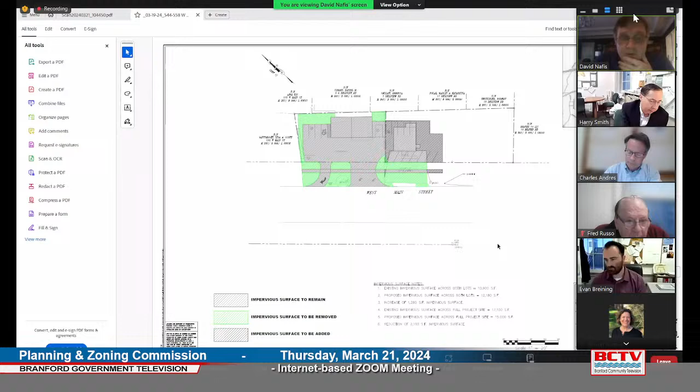Over the past couple weeks, we had... well, maybe I can just refresh a little bit of what's going on. We have the site with the existing building here. This building is going to remain, it's going to become the auto repair shop. This existing house is going to be razed right here. It's going to be gone.

And it's going to become part of what will now be the parking area for the cars that are required for the site, and then we're going to have extra parking in this area for what they consider car storage for cars to be sold. What we've done from last time...

There was a comment about drainage, so what we did is we've added some more infiltrators in the area right here. And what's going to happen is the roof leaders are going to feed down into the infiltration system. It'll be an overflow at the roof leader in this area. What this will do is, within the site boundaries, this will keep our peak runoff rates at pre-existing conditions. There is a slight increase of impervious on site, where that's the infiltration system.

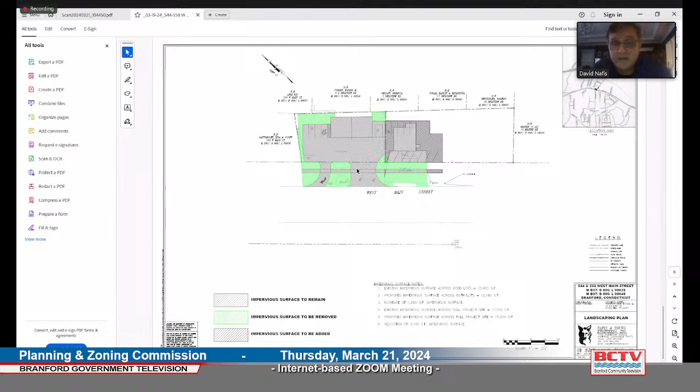In addition to that, the area outside that's still part of the project was not included in that. And what we've done in this area is we've actually reduced it, so we have a net reduction of impervious surface of 2,100 square feet. So this was paved from pretty much here all the way across with either gravel or bituminous, and you can see now we've added a lot of grass space in between.

Over the last two weeks, we've met with the landscape architect, Mr. Lawrence Appleton, and he basically gave us what he deemed we should do on the site.

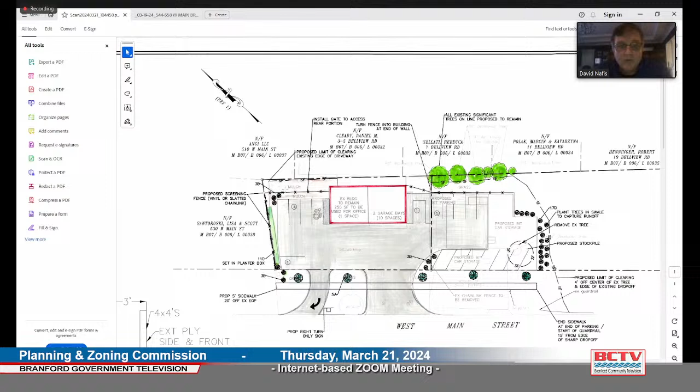Let me see if I can... so what he's looking for us to do is we've pulled the fence in on this side. There's a screen fence here, and we're removing some asphalt. We're going to mulch the area in the back here; this area will become mulch bed.

These are the existing large trees along the back line. So what he suggested we do too is pull this fence up to here. We're going to put a retaining wall in so we don't have to grade there'll be just some minor grading just to fill in here, but there won't be any really grading in the back of this area. So we should be able to preserve all these trees.

We've also added a small swale in this area with these trees, that he said we put the swale in, any sheet runoff in the parking lot will go here. And all these trees in this area will absorb that extra water before it goes downhill, which is a large wetland down here.

Where we show the silt fence here is basically where the top of the slope is. From here, then it really starts to drop off. So we're going to try to catch everything here where it's a little flatter before it has a chance to run off and go down the hill.

And you can see we've added, as he suggested, a couple of trees along the front that are up a little higher, so it allows visibility as people drive by. It'll add some screening, but it won't totally block the site so people can see the cars parked out in the storage area in front.

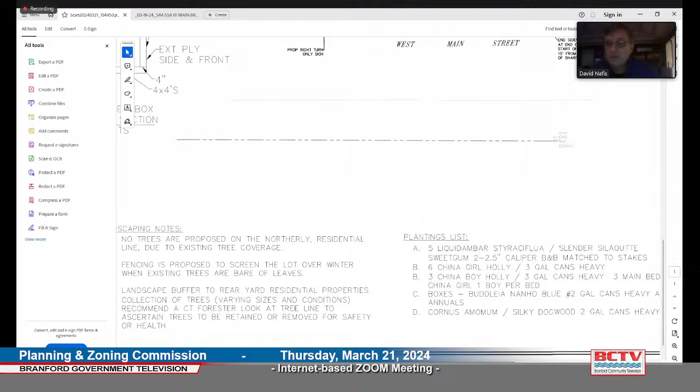And you can see we added a couple little trees around the whole site. The type of trees is on the bottom of the sheet, you can go through each one. I'm not necessarily a big tree guy, so I can't give you all the ins and outs of what does what, but I do know the ones over here, he said, were very good at absorbing water.

And this light green patch here is a planter box that will be set with a bunch of plantings to screen off where, even though it's a house, it's still in the business zone, so that's going to be put in. Other than that, that's pretty much the changes we've made over the last couple weeks.

Okay, understood. Thank you, Mr. Nafis. Anything else? From our end, that's pretty much it. Okay.

We'll turn this over to Evan. Evan, I think you've been reviewing this application. Do you have comments on this? Have you had a chance to review these, or where are we? I did not have the opportunity to revise my staff report. Received the plans yesterday. I believe there was also a stormwater report given to the town engineer, so he has yet to make a review or provide any comment. So I'd like to continue to the next meeting so I can prepare a response to the submitted plans.

Thank you, Evan. I would like to hear what the commission thinks. We had a discussion at the last meeting about the landscaping plan, so I'd like to see if these measures taken are something they're comfortable with. Thank you, Evan.

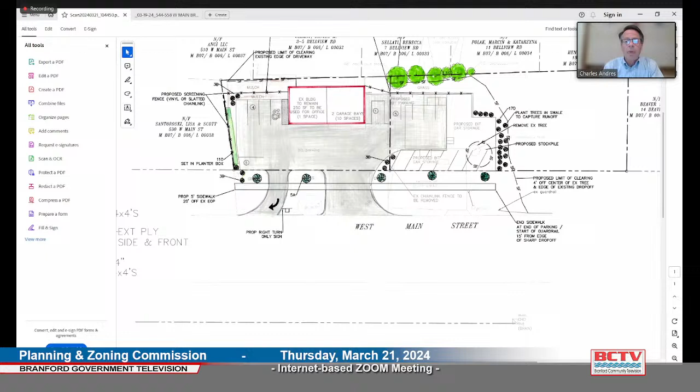Questions, comments from commission members? Hi, could you just zoom in on the plant list again, please? It's Marci.

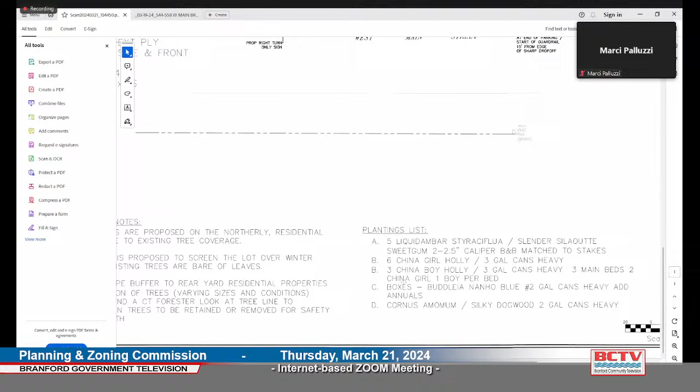Thank you, it looks much better. Thank you, Marci. Any other comments, Marci? Any other thoughts you'd like to make at this time?

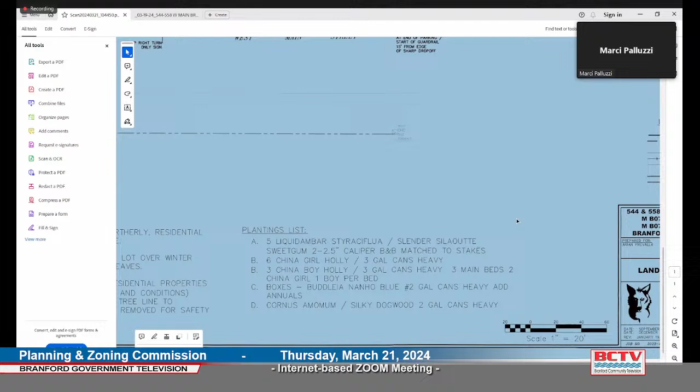Other comments from commission members? Yes, contrary to my flip response, we discussed this previously. I think the scheme has benefited greatly from probably not much effort on the part of the landscape architect, and the overall benefit, I think, will far outweigh any expenditure to provide it. Thank you, Joe.

Other comments from commission members? Sharon Hudner here. I would like to agree with everybody, and I think this just goes to show you how important it is to have a landscape architect look at our plans and make sure they have adequate landscaping. So I would like to thank the applicant for moving forward and doing that. Thank you, Sharon.

Other comments from commission members? Fred Russo. I just want to say I think this plan is significantly better than the one previously proposed, and I agree with all the other commissioners who feel that with a little more expertise added to the plan, it's going to enhance the property and probably enhance his business. It'll be more appealing, have better curb appeal. Just seeing what I see here now, I'm happy to see they took all of our advice, which was go back to the drawing table and come back with something better than what you had, and I think they've done that. So I'm happy with what I see. Thank you, Fred.

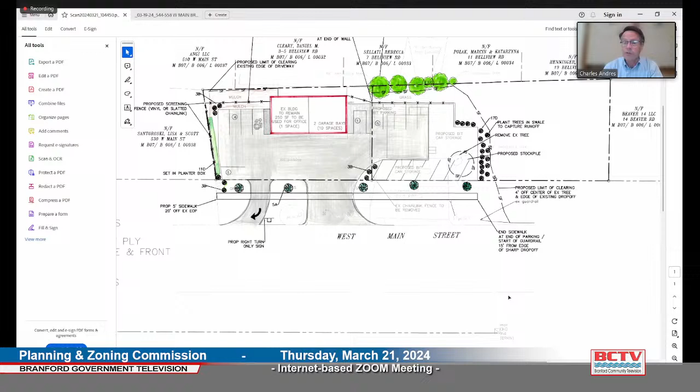Any other questions or comments from any members of commission or staff? Evan, let me just ask you, are there other questions that you had? I know there were a number of concerns besides the landscaping. Is there any question you wanted to call out?

I still have a number of items from my previous staff report. I'll have to skim through them and take a look. I can't think of them off the top of my head, but one thing I didn't see on the grading was this proposed swale. Was that on the grading plan, Dave?

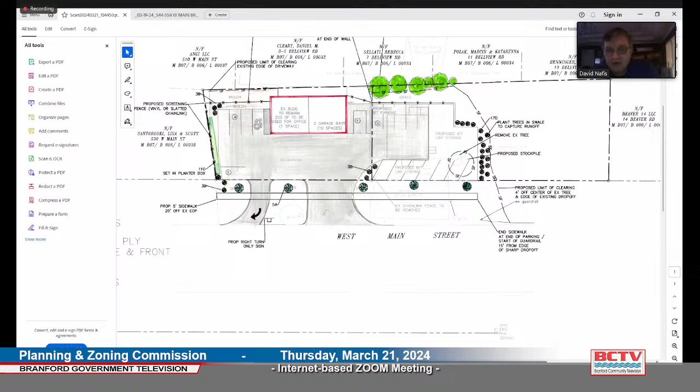I do not know. Let me see. It's gonna be very small, so it may not have shown. It's like right in here, and it's such a small area I don't know if it would even show up. Mr. Appleton asked us just to put a small swale to catch water, and then whatever trees we plant along there can absorb a lot of that water before it has a chance to run down the hill into the wetlands. Gotcha.

And what's the highest the wall will be? We've actually reduced the height of the wall a little bit in this area where we've cut the wall here, and the wall's going to get cut here and match. So this will be a little higher, and as you come around, it'll be lower. So the total height of the wall, I think, is about 2 to 2.5 feet at the maximum height in the back. Gotcha. Thank you.

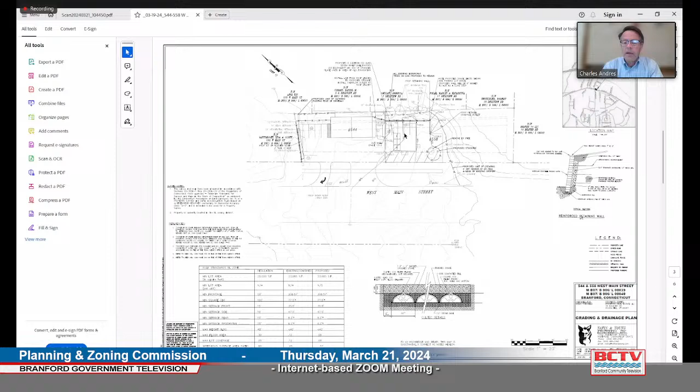Any other questions or comments from commission members before we open it up to the public? Hearing none, let's open it up to the public. Does any member of the public wish to comment? Evan will tell you how to do that. Right down at the bottom of your screen, there's a raise hand button. If you'd like to make a comment or ask any questions, please select that button. Looks like Perry Maresca would like to. Mr. Maresca. Oops, looks like you're muted, Perry. I just asked him to unmute. Okay, there you are.

Perry Maresca, Economic and Business Development Manager in the town of Branford. I do think that this is a good proposal, especially now that the landscape architect has put in the most recent plans. The fact that they're eliminating some of the paved area, giving more of a buffer from Route 1 into the facility, is great. And I just think that it's a huge improvement to what the property looks like right now. So I congratulate the owners of the property for making this effort and hope that planning and zoning can find the way to approve this. Thank you.

Thank you, Mr. Maresca. Any other members of the public wish to comment? Evan, do you see anyone? Is it Jackie Casey? I'm going to ask her to unmute. Jackie, do you see a prompt in the middle of your screen asking you to unmute? Oh, no. I'm going to try making her a co-host, see if that helps. Sure. There you are. Great. I'm so sorry. I have trouble with these things.

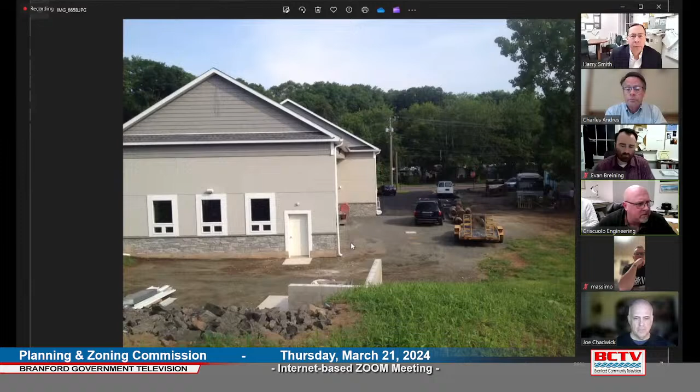This is what the building looked like previously. This is the J&E Auto Body currently, and you could see there was a junk bus there. This is the welding shop from the other side. They have recently cleaned the building up and reskinned it basically and replaced doors and windows, and you can see it's a much nicer looking building, very similar to the auto body shop next door, the same stucco feature and stone coursing and some shingles in the gable ends. We did go to the town center review. They were very happy about the appearance of the building matching the other building.

So why we're here is that they want to use the building as auxiliary space for the auto body shop next door. So we were asked to provide a possible parking and lighting plan. We did have a lighting plan done that was sent in. We show more than enough parking spaces here. Basically, the parking spaces would be more or less stacking spaces for cars either in process of being fixed or to be fixed.

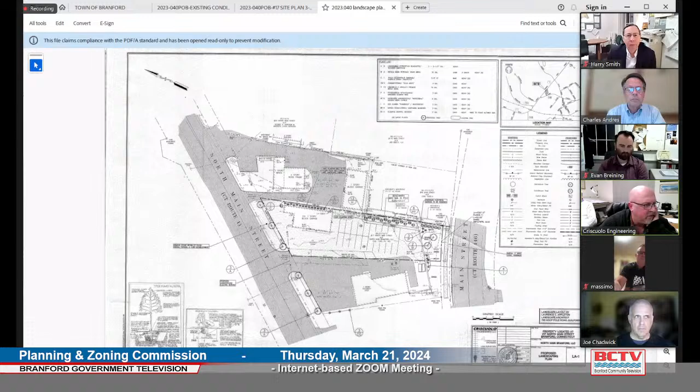We also have a landscaping plan that Mr. Appleton has helped us prepare. We are providing building plantings along the side here. There is an overhead door in the front, so we're trying to keep the space clear here because, although historically the old property had crushed stone right out to the curb line, that's obviously DOT's property within the right of way. So we're taking back all the gravel, all the stone that's out in the right of way, and putting in topsoil and grass.

We're providing a landscape buffer area along the residential district, which kind of comes through at an odd shape here. And we're adding some street trees along the front, and a street tree in the back. The street tree in the back is kind of pushed inwards a little bit though, because there is an existing billboard here, and we're not trying to lose all the view coming down the street from the billboard.

The neighbor, and we are adding planting here, but quite honestly, this neighbor here has a very thick row of arborvitaes along here that's 10 to 12 feet at this end, and then like 8 feet and 6 feet. I think they planted in different phases, but there's a wall of green there currently. There was a curb cut here historically that I think accessed that front overhead door, but again, we're taking all that crushed stone out. We're going to close that curb cut, so they will need to get in there from that end on site.

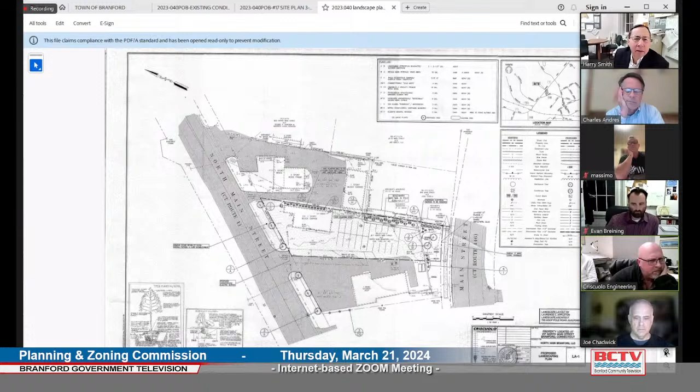I can't see it, it's kind of small scale. So, we are proposing some street trees right up against the property line, and then the landscaping on the north side will wrap around the front somewhat. But again, we're trying to keep this area open because they'll have to get in and out, and the other thing would be to provide access across to the other site without having to go on to Route 1. They're losing a curb cut here, so.

Yeah, I understand. You're at the whim of DOT when you put them in, is my understanding anyway. They can take them down if they need to, not that they're probably going to, but do you get the permission to put them in there? I would think you do. It'll have to get reviewed by them at some point. All right, well, we can look at that before the next meeting.

Jim, how tall is the retaining wall in the back? It is nowhere higher than 3 feet. After we heard that it went in, I actually sent my survey crew out there and shot it, and it's 2.8 feet here, 2.8 feet in the middle, and it goes down to just over 16 inches at the end. So it's nowhere higher than 3 feet. Thanks.

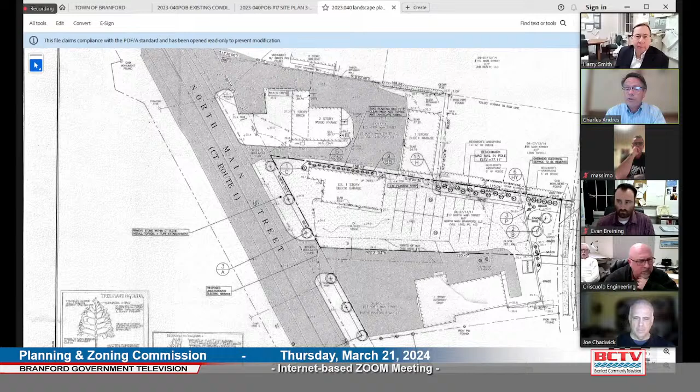Any other comments from commission members or staff before we open up to the public? Hearing none, then let's open up to the public. Any member of the public wish to comment? Looks like I see one raised hand. Yeah, looks like somebody calling in. Could you please unmute yourself and state your name. Can you hear me? Yes, we can hear you.

Good evening, gentlemen. My name is Maureen Gherkin, and I come from 43 Wilford Avenue, Branford, and my husband and I own 25 North Main Street. I received a letter that Mr. Amuno wanted a special exception for number 17, which he bought in 2022. He bought 13 North Main Street in 2012 and 23 North Main Street in 2017. I'm asking the commission to look with pause and concern regarding the entire project. I understand that it does look better in certain areas, but I wish that the whole entire site plan was one plan so that it's not chopped up.

I have concerns with driveways. I know this town did a study years ago about North Main Street and the driveways and the angles they recommended them to be if special exceptions were given to certain site plans. I have concern with how many cars are going to be on the property and how they're going to be positioned on the property. I have concerns for parking. I have concerns for sidewalk. I have concerns for landscaping. I have concerns that the cart went before the horse here, that work was done and certain things were not approved.

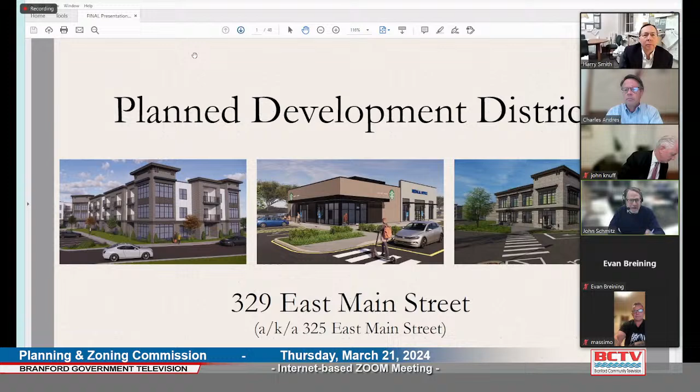Hi, thanks, John. Yeah, my name is John Schmitz. I'm a civil engineer and project manager with BL Companies, 355 Research Parkway, Meriden, Connecticut. I'm going to give you a brief overview of the site plan in general. Then we can go to the next slide. So this is a copy of Plan ALT-1, the survey, the existing conditions.

And just to orient you with the existing plan, Route 1, East Main Street, is along the left side of the plan, running up and down from the top to the bottom of the plan. Interstate 95, exit 55 on and off ramp is located at the top of the plan. The large rectangular building centrally located is the existing vacant cinema building. And then the smaller rectangular building on the left-hand side of the corner there, that would be the existing Walgreens.

There's currently two means of access to the site off of East Main Street. One is a right turn only driveway into the site at the lower left-hand corner, right there. And then we have a full signalized intersection for our main driveway, centrally located in the middle of the site. That is a four-way intersection. Zane Cycles is located directly across the street from us.

So they share the same traffic signal as we do. There's circulation throughout the site today. The site is approximately 63% impervious. There's roughly 622 parking spaces on site today. Obviously, the vast majority of that is unused since the cinema is vacant. It has been maintained, though, throughout, as has all the stormwater systems.

With that said, there is a significant wetland area on the rear of the site, on the far right-hand side of the page. That area is one of the reasons why we ended up going to inland wetlands due to our proximity. We're certainly not developing that area.

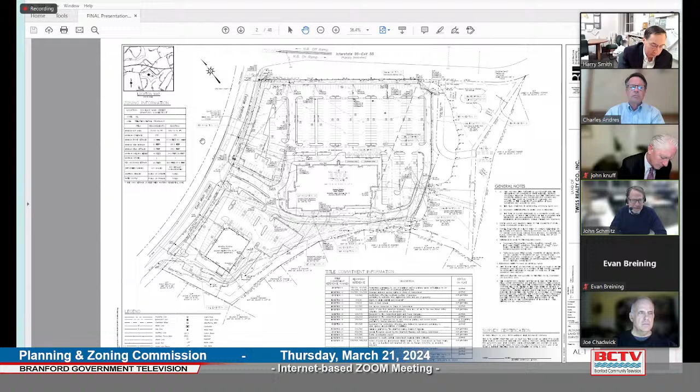So this is a rendering of the site plan that was submitted with a planning and zoning application in February. You'll note the large rectangular building. The cinema is still there, still the same size, location, and obviously that's not moving.

But we've added two new buildings. One is what I'll call a T-shaped residential building that is positioned parallel with the exit ramps. And then we have the smaller, roughly 5,000 square foot combination coffee shop and medical office building with drive-through fronting on East Main Street. We are maintaining our existing site access driveways, so we'll keep all the same traffic coming in and out of the main signalized driveway as is today, and then circulation throughout the site.

There are several parking areas to access both the commercial as well as the residential lots. We've provided for amenity spaces to the rear of the residential building, correct there. And then you'll notice there's a dark gray band right there, kind of where the pointer is. That was installed as part of not only access for our stormwater system, but also for fire purposes, for emergency access, so that fire trucks could have access to that end of the building.

You'll also note that down at the lower end of the building, correct there, we have a proposed dog park and an amenity space that's just to the right, just to the right of the existing cinema. That was where it was originally proposed.

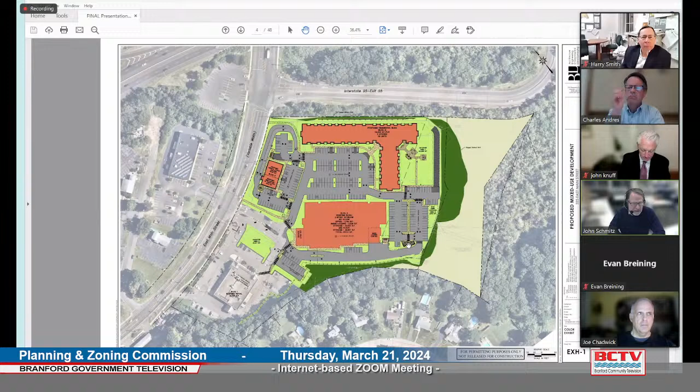So residents of the development have opportunities to walk not only to the pharmacy, but to the coffee shop, to the bus stop, to Zane Cycles, up and down Route 1, which already has a large increase in sidewalks recently. Again, we've been able to create a community here that really fits in well with the area.

Maybe we jump down to the next slide, it may just show. Yeah, so this slide just does a better job of illustrating some of the sidewalks that we've added onto the site. The red lines on the site itself illustrate the proposed walks throughout our development.

And then it shows connectability and connectivity to the existing sidewalks along Route 1. That is highlighted by the gold or yellow lines on both sides of Route 1. Again, existing bus stops up there.

In addition to that, I just wanted to mention that we would again be revising some of our landscape plans, stormwater, and lighting. We've made some headway in the last couple of days to take on as much as we could to make some revisions, but we've still got some work ahead of us as far as the detailed design goes. And we will be addressing that in the future with a revised submission.

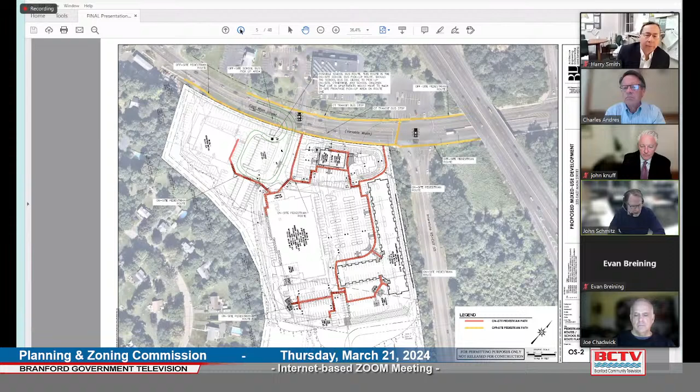With that, that's kind of a high-level overview of the site in general. I'm going to pass things off to Sal, who's going to give you an overview of the residential building. Hello, my name is Sal Talamo from the Sullivan Architectural Group.

The residential portion of the project consists of a three-story multifamily wood frame building. The building offers 116 units with 176 parking spaces at 1.5 spaces per unit, provided in several lots. With our architectural experience for this type of project development, providing 1.5 parking spaces is appropriate and necessary regarding the suburban setting of the project's location.

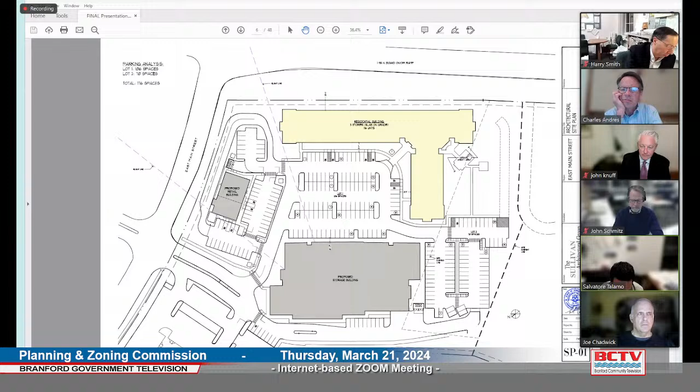With the recent reduction in parking, the previously proposed multiple exterior spaces will now be consolidated into one larger area, offering an opportunity for more enhanced exterior space benefiting the tenants. This was what was previously discussed. The building is laid out in a T-shaped configuration with a centralized corridor with units on each side.

Can we go to the next slide? So that was the amenity space there.

This is the first floor, where we can see the corridor and the units. The ground level features an amenity space that consists of a club room, fitness center, business center, and the exterior terrace at grade as shown.

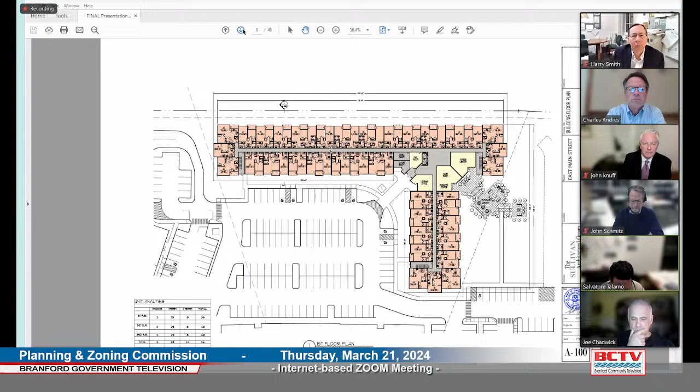The next slide shows the typical floor plan, which has stairwells at each end of the wing with direct access to the exterior, and an elevator lobby at the intersection of each wing.

The building geometry consists of flat roofs broken up with variations in the cornice line, providing the building's massing with proportion and scale. The darker masonry with lighter clapboard siding provides a contrast to the massing.

Various arrangements of double-hung fenestration further articulate the building's geometry. Balconies with metal railings break up the facade, providing an added layer of scale and depth, as well as providing the tenants with their own private exterior space.

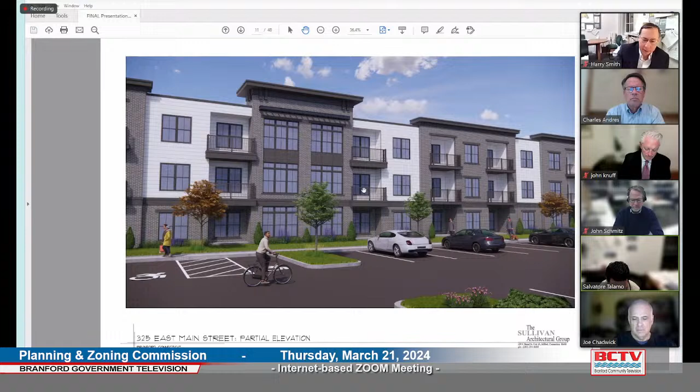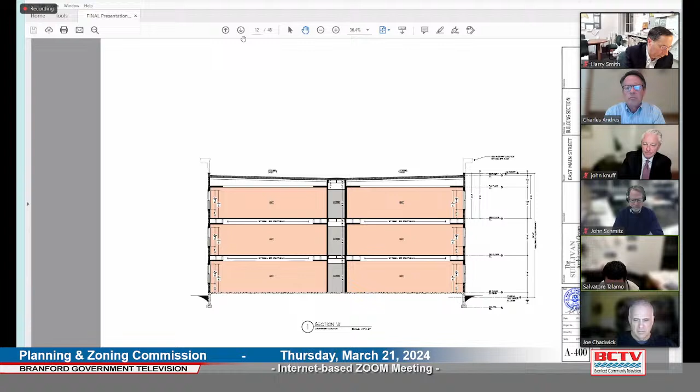The next slide shows a section with the building's height at 3 stories. We are below the required 40-foot max, and there is no need for a variance as previously mentioned. The height to the tallest parapet is 39 feet 8 inches, and to the lowest parapet is 36 feet. This difference offers a variety in scale and proportion, driving the building's character.

The mill building's massing is clad in traditional materials with contemporary contrast and color, providing the community with both a modern and timeless aesthetic. The extent of the variation in the building's geometry offers its tenants a variety in articulation, as well as offering the town a revitalization of the property's past.

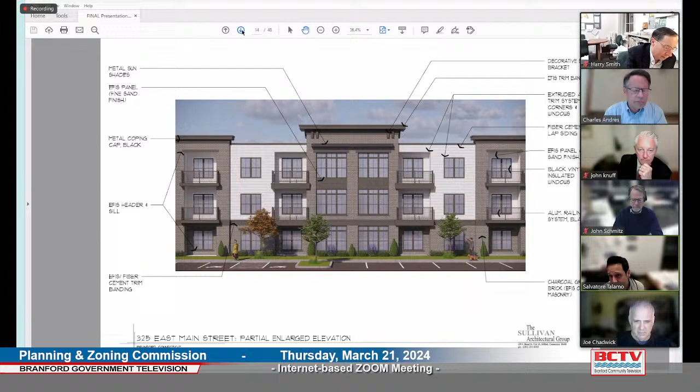So that pretty much sums up the residential architecture portion of the project.

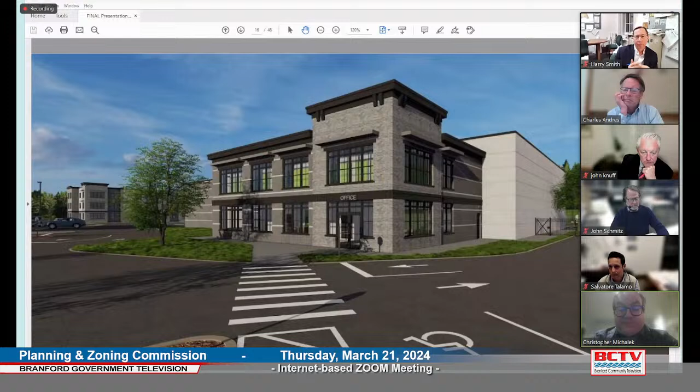A customer would drive back to the back of the building, using their access code to move through the gate. That same access code would be required to open the loading area through a couple of overhead doors. Then those doors would close and the customer would unload their stuff and transport it to their rented unit.

And then also to touch on security a little bit more, the size of this building is probably about 35 cameras inside and out. It is 24-hour monitored. There will be an on-site manager and assistant manager, probably during normal business hours, being 9 to 5. Access hours to the facility are probably 7 a.m. to 9 p.m., 10 p.m. It probably won't be a 24-hour facility.

The main operators, although I don't think we have one on board yet, but most of the big operators like Extra Space, Life Storage, CubeSmart, and the like, they're not 24-hour facilities, and they're really meant to be for the residential storage uses. And with that, I think that's a nice nutshell of the storage building.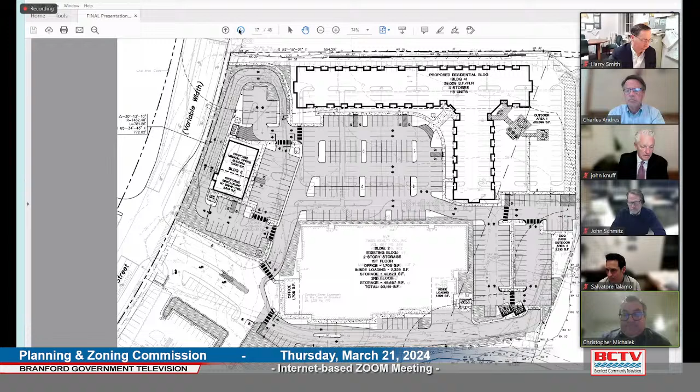Thank you, Chris. And the next presenter is Tom Scott. Harry Smith, Town Planner. I hope I've made Mr. Scott a co-host. I'm not sure that I picked that up right. So, all right, I think he's all the way down at the bottom of the list. No, I found him. Okay. Should be all set. Thank you. There you go. I was able to unmute. And let's see if this video, there's the video.

Hi, my name is Tom Scott. I'm a project architect from Scott Griffin Architects for the retail building. This is obviously the smallest building on the site at about 5,300 square feet. There's planned 2 tenants in the building, 3,000 square feet for the medical office use, the walk-in urgent care type use, and then the coffee use, which would be, as we've depicted, Starbucks. The Starbucks would also have a drive-through pickup window on the Route 1 side of the building.

The Starbucks has a brick veneer. It's a little hard to see in the rendering, but similar to the other buildings on the site, we tried to design this building so that it had a complementary style to the buildings that are adjacent, the residential and storage buildings. The Starbucks building has 2 styles of brick. It has a vertical soldier coursing above the 10-foot height, and a stacked horizontal coursing down below. So the whole facade of the Starbucks building is a brick veneer building.

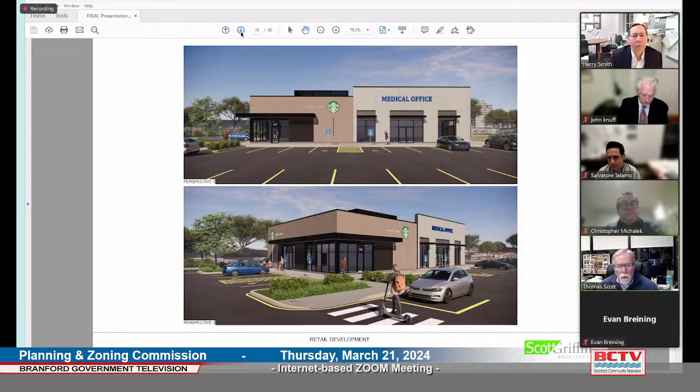There's a visual screen on the roof, which would be a black metal horizontal louvered element that would hide all of the rooftop equipment. The height of the building is 20 feet, and it has a black metal edge on the top of the roof parapet. We've incorporated a black metal canopy element about 3'6" deep that surrounds the building on 2 sides, which basically defines the storefront windows. It wraps the building around to this side as well. On this side of the building, you can see there's an outdoor dining area to the left. The outdoor dining area has tables, chairs, umbrellas, site amenities.

There's also a similar canopy, as you can see in the lower rendering, that wraps around the pickup window on the back side of the building. Similar black metal, but that particular element where it bumps out from the building is wrapped with an articulated wood, like a rough sawn wood material. And that wood material is repeated again below the canopy where the storefront is in several locations. So there's kind of a recurring theme of materials around the building. There's Starbucks branded signage on the building as well as on the complementary order boards and menu boards.

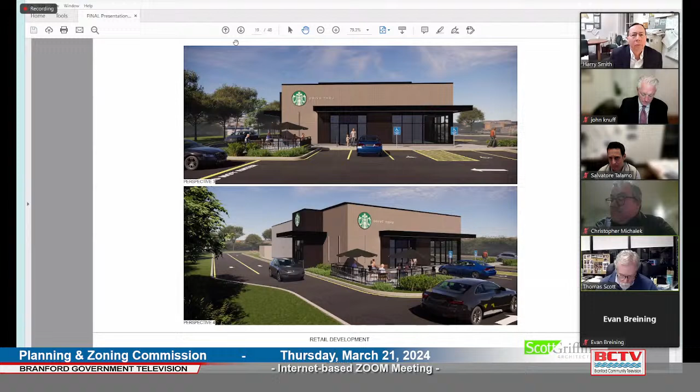The building to the right is the medical office, slightly taller than the Starbucks, again, to help conceal the rooftop equipment. The panel facade will be a Nichiha, which is a cement-based panel material. So it'll be a very systematic and organized panel material. We've introduced similar eyebrow canopies over the window elements, accentuating the window locations with a wood material in the recess just above the canopy. So again, repeating some of the similar elements, not only around this building, but from adjacent buildings on the site. The windows are black aluminum to complement the adjacent tenant.

They're set back slightly in a recess that allows the accent band above. The horizontal shade canopies are accentuating the window locations. The building has a simple modern design with ample space for future tenant signage. So again, we don't know who the tenant is going to be, but we've allowed for plenty of space for signage. The side and rear of the space will have matching EIFS panels to help control costs, but it'll be defined with reveal elements that'll be similar to the panels out in front of the building.

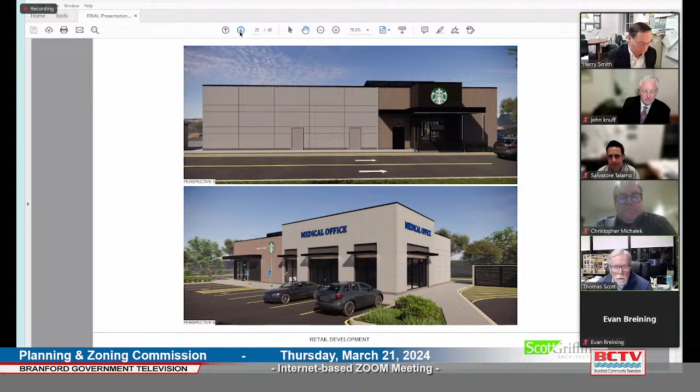And that's pretty much it. We pass on to whoever's doing the next traffic impact study. Which is Rob Baltramaitis. Okay.

Thank you, Attorney Knuff. Good evening, Mr. Chairman, Commissioners. For your record, my name is Rob Baltramaitis. I'm a consulting traffic engineer. I have over 30 years experience as a traffic engineer, a licensed professional engineer in the state of Connecticut. When I testify as a traffic engineer, I do like to qualify myself. So if you would indulge me for a minute.

In addition to those many years of consulting, I've also spent 24 years as a municipal engineer and a public works director. In that capacity, I give advice and direction to the land use commissions in my town, as well as our legal traffic authority on traffic matters and MUTCD, or Manual on Uniform Traffic Control Devices compliance. I also maintain and operate 30 town-owned traffic signals, including a computerized closed loop system to keep them all coordinated.

So BL Companies is the traffic engineer of record. I get brought in on some of their projects, usually larger ones, to really collaborate with them during the preparation of the traffic impact study. I think what they find is I bring almost a level of a peer review from a municipal standpoint. And that is the case here. So thank you for indulging me.

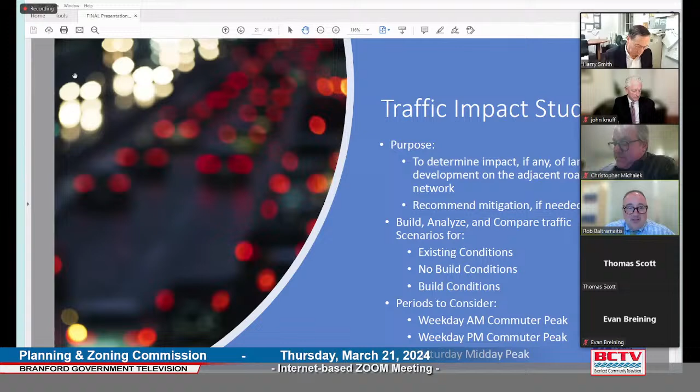Thank you. So to develop these models, we need to collect data. The first thing, the most obvious, is traffic volume data. We're going to count cars at our intersections by movement, by approach. And by movement, I mean, are they turning left? Are they going straight? Are they turning right?

In addition to the traffic volumes, we're also going to collect roadway and intersection data. What's the lane arrangements? What are the lane widths? What are the traffic controls? Is it stop sign controlled? If so, is it an all-way stop? Is it a two-way stop? Is the intersection signalized? If so, what are the signal phasings and what are the timings? These all go into these models to ultimately determine the vehicular flow capacity of the intersections and the average driver delay at each of the intersections. I'll talk more about that in the analysis portion.

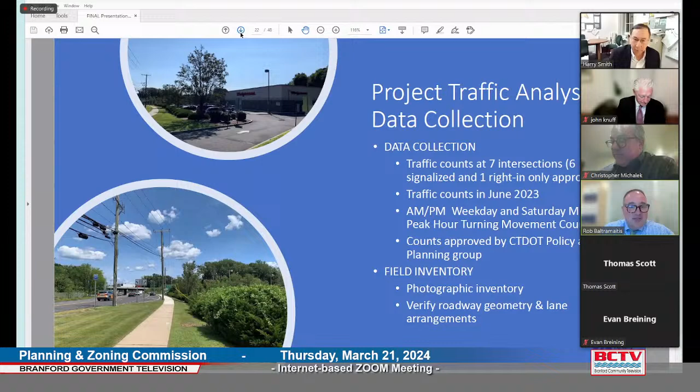The other intersections in our study, if we move to the north of the site, the first one is the signalized four-way intersection of Route 1 at the I-95 northbound interchange opposite the commuter lot.

That's interchange number 55. Continuing north, the signalized T intersection of Route 1 at the I-95 southbound interchange. And finally, further to the north is the signalized T intersection of Route 1 at North Branford Road, which is State Route 139. So once we collect all these volumes and the roadway data and the traffic control information, we can start to prepare and put together our existing condition model.

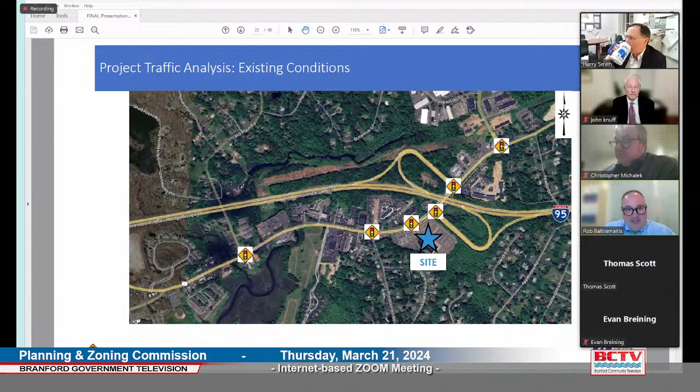So the next model that we want to build is what we call the no build condition model. And that is the existing, sorry, next slide, please. Thank you. All right, so the no build condition is essentially the existing conditions at the time of our project completion, but it does not include our site traffic.

So simply put, in our case here, this is a project that we feel can be built in 2 years. The study again was dated December of 2023. We want to know in 2 years, in December of 2025, what are the existing conditions? So we have to take our existing conditions and we apply an annual growth rate. And this area, according to the DOT, it's 0.8% annually. So we make that increase.

And also in the no build traffic, we want to include trips associated with other developments in the area that are approved but not yet constructed. And I believe Attorney Knuff mentioned the Metro Star project on the other side of the highway to us. When we did our counts in late June of 2023, that project had begun but wasn't yet completed. So in our no build condition, we add traffic that represents the full completion of the Metro Star project. And so that is our no build model scenario.

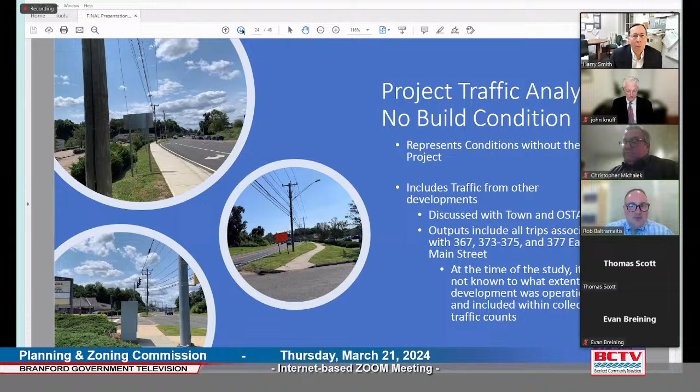And finally, we need to model the build condition, which does include our new site trips. Probably the next slide, please. Okay, and under our build condition, we're going to be applying the traffic, and as I mentioned, the site is served by our primary driveway, which we call driveway number 1, which is a signalized driveway to Route 1, and also by a second driveway, the right turn in only on the opposite side or south side of the Walgreens site. Those new site trips get superimposed onto those no build trips to represent the build condition.

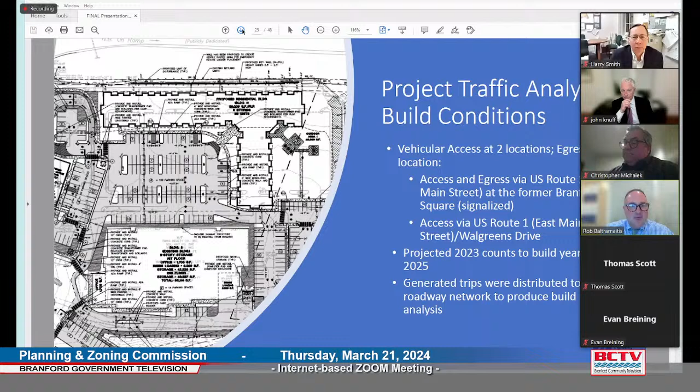So if we could go to the next slide, I want to talk about how we estimate new site traffic. So estimates for new site traffic come from a publication called the Trip Generation Manual. It's published by ITE, or the Institute of Transportation Engineers. It's currently in its 11th edition. And what that manual really is, is a compilation of studies that compares some measurable aspect of a land development project with the number of trips that it generates.

So for example, for a gas station, you might estimate the trips based on the number of gas pumps. For a hotel, it may be the number of guest rooms. For our case, for the retail component, which is the coffee shop, for the self-storage component and office uses, those trip estimates are based on the square footage. And for residential, it's based on the number of dwelling units.

Like I said, the manual is in its 11th edition. It has grown tremendously in the 30 years I've been using it. And it gets very specific for the uses. As an example, the residential component, it's not just residential dwellings. It's actually specific to this type of project, which is entitled multifamily housing mid-rise.

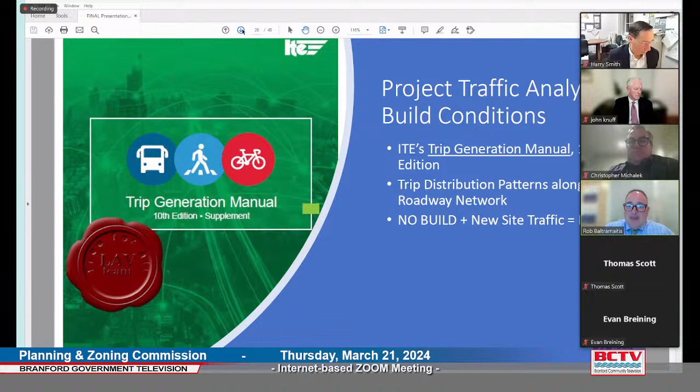And I'm just going to give you the definition of that. Mid-rise multifamily housing, including apartments, townhouses, condominiums, located within the same building with at least three other dwellings that have between 3 and 10 floors. So again, the manual can be very, very specific, and it is for each of our four land uses in this case. So if I could have the next slide, please.

All right, this is a table that summarizes the trip generation characteristics of our site. You can see each of the four different components, the rates from ITE trip generation, and the totals. One thing I will mention is that not all of our new site traffic is new to the roadway system. It's all new to the driveway, but when you start looking at the adjacent roadway network, not all of it is new. And ITE and DOT methodologies allow for a pass-by credit for some retail uses, such as the coffee shop. So when I'm explaining pass-by credit to people, I like to use the example of a gas station.

So if we're home and we realize and think we need gas in our car, we're probably not running out to get gasoline. We're going to do it the next morning when we're out on the way to another destination. And that is the perfect example of pass-by traffic. So what ITE allows for coffee shops is a 50% pass-by credit for the site-generated traffic associated with coffee shops.

So at the end of the day, our project is anticipated to generate 155 new trips during the morning peak period, 118 in the afternoon peak period, and 165 new trips during the Saturday midday peak period. So this is where I like to break things down a little bit. If we take that worst case of 165 trips in an hour associated with this, I think to most people, wow, that sounds like a lot.

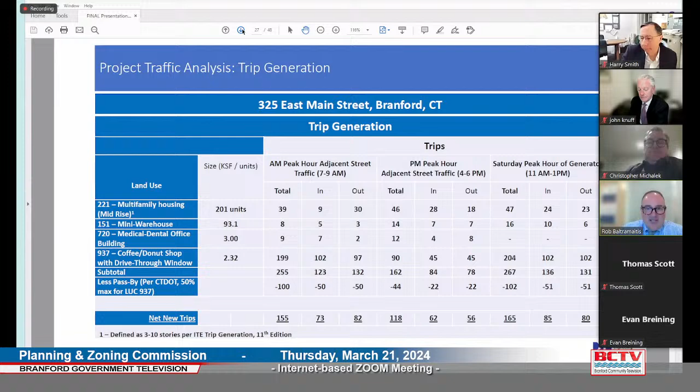Okay. What this slide is showing us, so while the theater building is of course vacant, I think it's worthwhile to compare what the site could generate tomorrow if an operator came in and took over that theater for its original use. And based on ITE trip data, with the exception of the morning peak hour, because theaters wouldn't generate much of any traffic in the morning, what we find is for the PM peak hour and the Saturday midday, our project actually generates much less traffic than that theater would in operation. It's almost 200 cars less in the afternoon peak period, and about 60 cars less in the Saturday peak period.

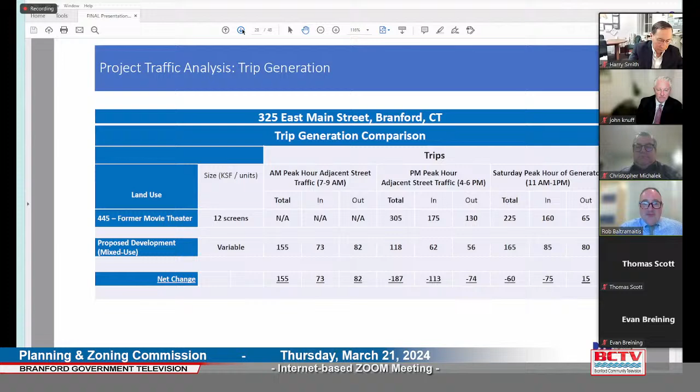So like I mentioned, the new site trips get applied to that no build condition, superimposed based on travel patterns in the area to develop our build scenario. So now we have our 3 models, our existing, our no build, and our build. The next thing we need to do is analyze those models. Next slide, please. And we analyze the models using software entitled Synchro that is made by Trafficware. It is the most widely used and accepted traffic modeling software in our industry. It's based on the methodology of the Highway Capacity Manual published by the Transportation Research Board.

And at the end of the day, for each intersection, for each study period and for each model scenario, what the models are doing is calculating the average vehicle delay. How much delay is that driver experiencing? And then the delay is tied to the measure that defines the operation of the intersections, and that's level of service. And as drivers, we've all felt this. When you arrive at a traffic signal, did you get processed through in a few seconds, or did you arrive and it took you 2 cycles and 5 minutes to get through?

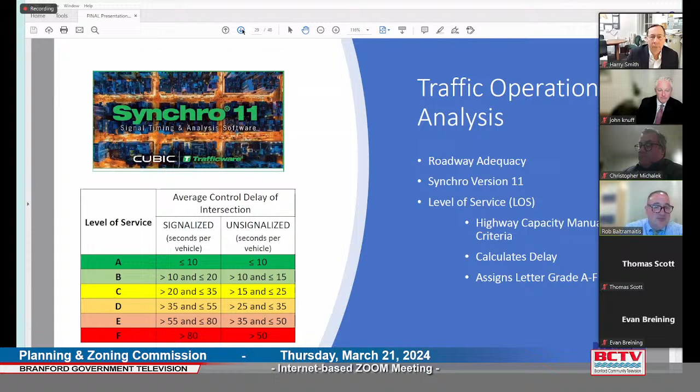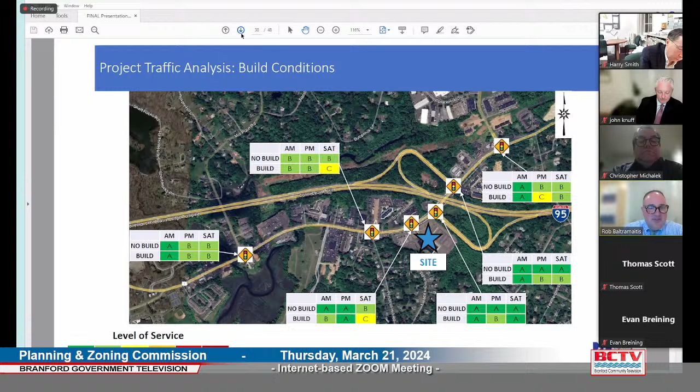The mitigation is really to be on site. There's two suggestions. There's two ingress lanes into the site. The leftmost lane, we're looking to convert that to an exclusive left turn lane to better serve and improve circulation to get to the mixed use development. And in conjunction with that, we're also looking to shorten the existing raised median island within that site driveway, also to facilitate that left turn into the mixed use portion of the site.

This project, and I should say the site, Branford Square, presently has a major traffic generator certificate from OSTA, the Office of State Traffic Administration. We have to go to them for a revision with this project, so that is another level of review by traffic professionals this project will have. And then finally, as mentioned by Attorney Knuff, the commission has SLR as a peer reviewer to the traffic impact study.

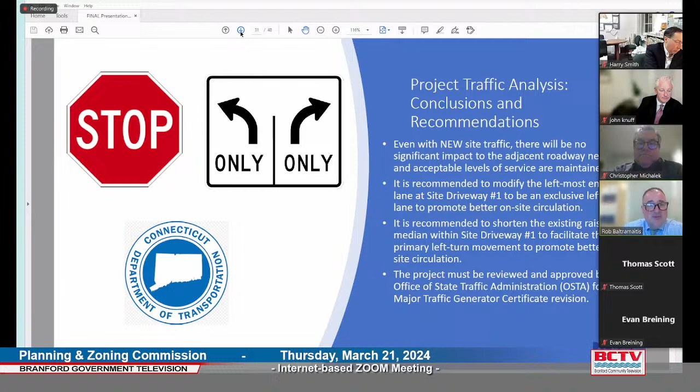We did just see their peer review letter of March 18th. From our preliminary review of it, we feel that we will be able to discuss with SLR and respond satisfactorily to address all of their comments. We'll be doing that over the next month. And that concludes my presentation. I will turn it back over to Attorney Knuff, and I believe we will all remain for any questions that the commission may have. Thank you.

Thanks a lot, Rob. So, Mr. Chairman, as we noted, we still have some work to do, primarily to respond to Harry's comment letter and also the SLR letter. But we want to hear your thoughts in terms of the progress that we've made, not only in the past few days, but frankly the progress that we've made since we all talked to you last July. We certainly hope that you feel that we've been adequately responsive, and we can continue the dialogue in terms of how to make this site the best we possibly can.

Chuck Andres, Chair. Thank you, Mr. Knuff. At this point, why don't we start with our town planner, Harry Smith. Harry, you prepared the memo, and I know that Mr. Knuff and his team spent a lot of time responding and indicating some reactions to that. So perhaps you could run through part of that with us to start off with. Harry, you're muted. Sorry about that. Harry Smith, Town Planner.

First, I just want to express my appreciation for the flexibility of the applicants and the development team and Mr. Knuff in looking at the comments and getting right to it and trying to see how they could adjust things on the site. My goal as well as their goal, I think, is to make this the best project possible, assuming the commission does vote to go ahead with it, because you are, when it comes right down to it, doing a zoning regulation change as the PDD approval process would dictate. So it's a high level discretion on part of the commission.

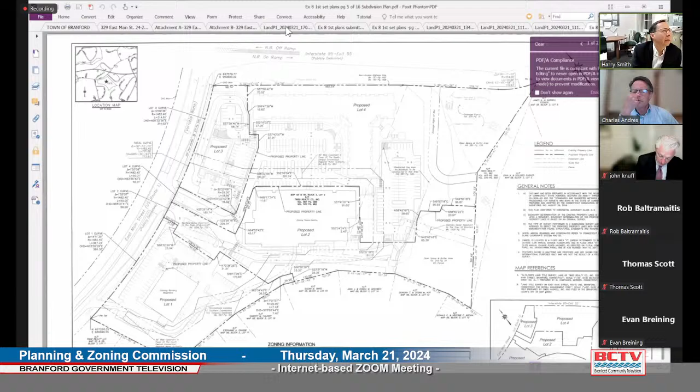So there are some proposed things to consider. Going back to the landscaping plan here, which again, as you can see, it's pretty busy. Fire access, I want to look at the arborvitaes here. I think I mentioned that.

There's, moving sort of this up, the backs of residential properties that front on Meadow Circle Drive here. This is all wetland areas, so I don't know where the residential zone starts, but I think it's not any closer than the property line of the applicant here, which is well back from the developed area of the site. So effectively, there's a residential district buffer here.

I think at least doing a rough outline of where the tree line is and the fact that it's all wooded, I think that information should be presented. I don't think we need to get into what kind of trees are in that area.

But there is some vegetation along here that's not really indicated. I believe there were some plantings put in '97, or when the movie theater was built after that, to kind of enhance the buffer here. But I think that requirement for the residential district buffer needs to be addressed, either through the existing vegetation or some combination of further enhancements if that's needed.

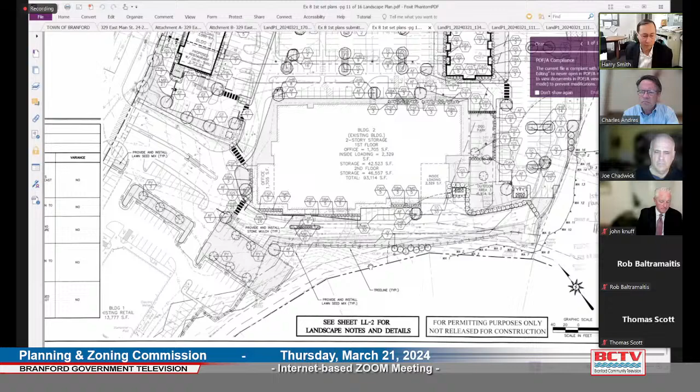There is a short retaining wall up here, I think no taller than 2.5 to 3 feet at the very maximum. There's a wooded area here along the ramp, but seasonally it is visible. I don't know what the treatment of that is. I don't believe I saw anything on the plans, unless I missed it.

Either some detail about the wall and/or the regulations requiring proposed vegetation. There is, I believe, a tree line noted here, so I don't think the intent, I would imagine, is to disturb that beyond what's necessary. There has been the property lines augmented with some vegetation, certainly here and along here. But looking at what's possible, just even some plantings to drape over the wall to break it up a little is something commissions have asked for and required before.

There is no information at this point other than the '97 landscape plan for the Walgreens portion of the property. I think the lighting that's there now is going to be retained. The landscaping should be shown on the plans because that's part of the development, even if it's not changing much. It's possible some things would need to be upgraded to comply with existing regulations.

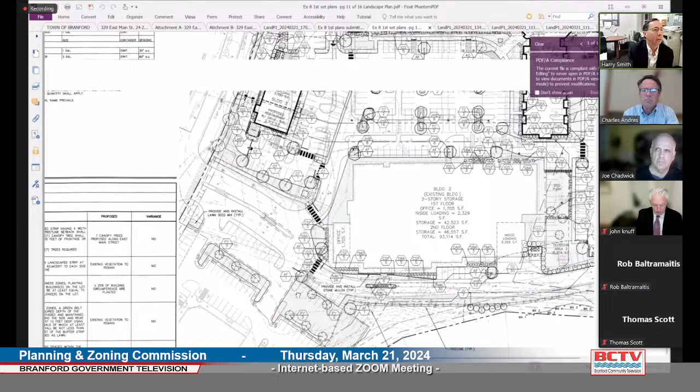Lighting itself, I won't talk much about because that might be in the process of being modified, but the proposed pole height of about just a little over 23 feet, I think, really gives it a commercial feel—that's the typical height for commercial parking lot fixtures. I think dropping that down, I would recommend around 15 feet, would go a long way toward enhancing the residential feel of this part of the development.

It requires more poles, that's true, but I think it would keep that ceiling lower and reduce the potential for light trespass into the windows of some residential units facing here and here. This building's views are going to be a little tough—the upper floor might be nicer, but you've got the highway on one side, then a parking lot, and this repurposed building's going to be a self-storage facility that way. So real views of vegetation are going to be limited to this side of the building, I'd imagine. Things that can be done to make it less commercial in appearance would be very beneficial, and that's certainly one of them.

A few missing items, I'm sure will be addressed: bicycle parking, snow storage.

I have not heard anything about proposed phasing, so whether it's going to be all in one phase or broken out is unclear at this point. It should be clarified. We did do the statutorily required referrals for the PDD to the town engineer's office, police department, the fire department, and East Shore Health District.

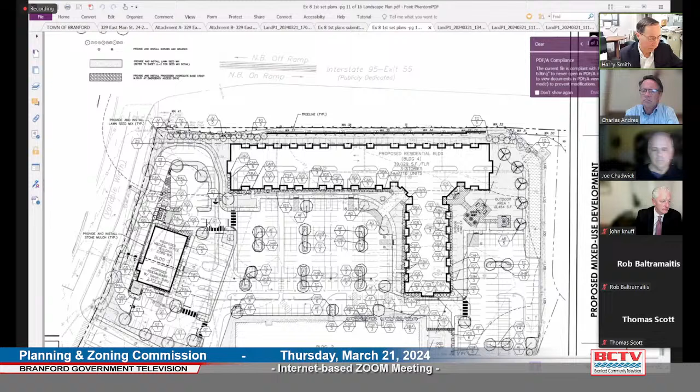One other comment I wanted to note, this is part of the access management district. It's not really on this sheet of the plan, but you can see right down here, I believe this is the part of the property of Branford Auto Center that extends down to the intersection of East Main Street and Windmill Road. Similar to the development that occurred on the other side of I-95 by MetroStar, having some kind of easement in place for potential access here through these two properties, should that site ever be redeveloped, is something I'd bring up to the commission's attention as staff, as it's part of the access management district requirements to look at and put in place as it makes sense.

There is one large sign here, I believe, somewhere in the median, between the two parts of the access drive. How that's going to be handled with the subdivision is unclear.

The whole subdivision itself brings up some questions. First off, I don't know if it's a resubdivision or not. There was a subdivision approved by the commission in concert with the cinema approval that sliced out a parcel for Walgreens. I'm not sure if that was ever filed with the town clerk in order to make it effective or not. But if that was done, then this would be a re-subdivision. All that does is change the timeframe for review from 65 days to 65, 35, 65.

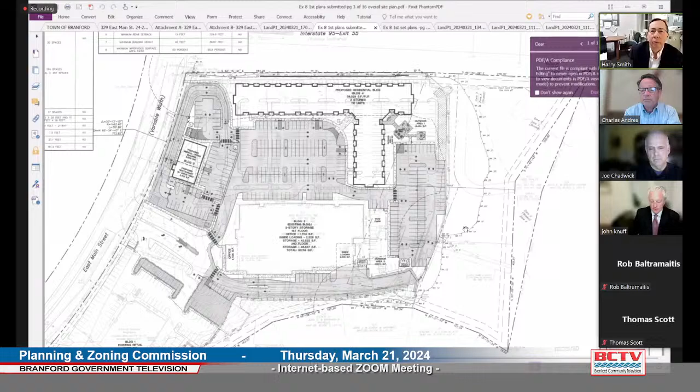Chuck Andres here. Yes, certainly we're happy to hear from our peer review consultant. Good evening, everyone, excuse me one second, my voice is a little scratchy. Sorry, I should have introduced you, Anthony Russo. Yes, Anthony Russo from SLR. Office is located in New Haven.

The applicant gave a very thorough presentation of what's included in a traffic study, the methodologies, and the ultimate goal of a traffic study is to determine if the proposed project has an impact on traffic operating conditions on the roadway network. So I appreciate that introduction that he gave.

Couple of comments. I'm not going to go through each comment. Some of the stuff I can see has been somewhat addressed, but I'll go over some of the more important ones for the board.

Traffic impact studies not only look at level of service, and there was a slide put up to show that the overall level of service was still in what's considered a good range during peak hour operating conditions. But traffic impact studies also take a look at queue as well, to see if the turn lanes in the area are impacted by the project.

So in other words, if there's a turn lane where there is an existing queue or a no-build queue, and the project is going to make that lane exceed its capacity or exacerbate it further, that could be a queue impact. So one of the comments we have is for Table 7, where they present queuing information, is for them to include the storage length in feet of all exclusive turn lanes analyzed in the study area, and to also take a look to see if the proposed project would have an impact on the storage capacity.

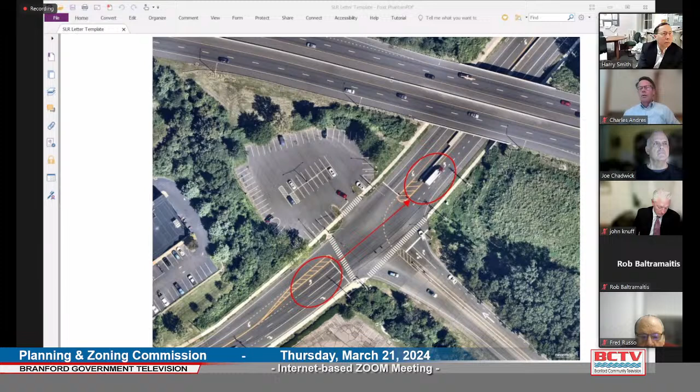I see that the applicant has taken in their presentation tonight. One of the comments they had was really a more thorough discussion on internal pedestrian, bike, and vehicular circulation on site. I see they have a graphic that highlighted that. I think that's a good start. Town has to review that. I'll review that with the town as well.

And how people get to Walgreens. I think they made some improvements in connections, to show that as well. But I think that should be part of the traffic study, the discussion, the graphic. And if anything else, they need to fine tune that, they think, to address the comments. I don't think it should be silent on that type of issue.

The other thing is kind of tied to that is you're going to have a residential building. It is likely you're going to have kids. They may want to bike to Starbucks. They may want to bike to Walgreens. They may want to walk. They may get friends from outside the community that are going to come to visit them, and they're going to want to hang out there. It's kind of a natural thing. Just to make certain that you show how that will be accommodated.

The bike racks, as mentioned earlier, Mr. Smith, just to make certain that the circulation is safe, especially considering that people are going to want to walk or go to these other sites. And that's part of what a mixed-use project is.

The other thing is the crash data. I noticed that the crash data did not include the year 2023. I would question to the applicant. They don't have to address it tonight, but I was hoping that there was more recent crash data available. They could update the traffic study to include the year 2023 or whatever is available for the year 2023.

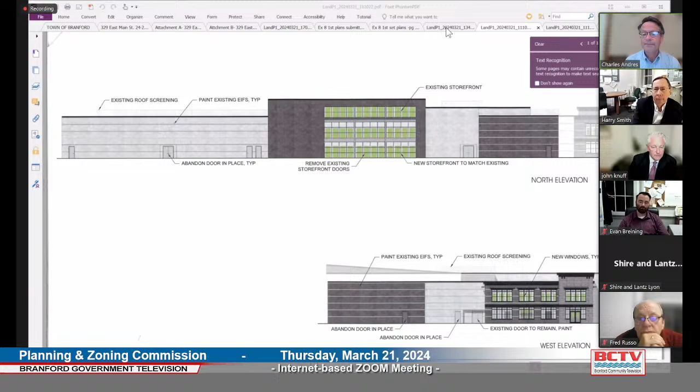Okay, I don't see anyone. Then the next question is, when do we want to continue this to? Do we want to make it in 2 weeks, or a month? Yeah, the first or second meeting. What do you think? As I said, Mr. Chairman, I don't want to give up the opportunity to come back to you in 2 weeks. I think we can keep the pedal to the floor, and I understand we're going to be submitting a lot of information back to Harry that he will have to pore through, and then offer his comments again to all of you.

Listen, the worst case scenario is let's plan on being back before you in 2 weeks. And if we don't feel we're ready, or if we feel that it would be wasting the commission's time to do this iteratively, we can make that decision a day or two before the meeting, and we'll just continue the hearing. We'll say we're going to continue until your next meeting, and then that will be that. But I don't want to just automatically assume that we can't make that. Okay, that's fine. Harry, does that sound okay?

No, that sounds reasonable. I understand it's sort of in flux and in process, so that makes sense. Okay. And by the way, in terms of Harry's last comment, we can dim those lights inside. So there's lots of things we can do. But I think really consider eliminating at least the one on the cinema facade, the entrance facade. But that would be my personal comment. We'll see what the commissioners think. Thank you. All right. Okay.